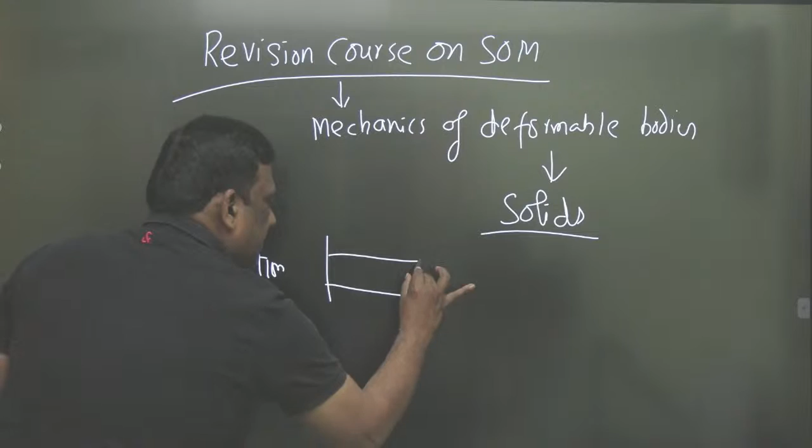The first classification is based on the direction of loading. We call this axial load - if the load is parallel to the longitudinal axis. If that load passes through the centroidal axis, we call it pure axial load. And if the load is parallel to the axis but not passing through the centroidal axis, somewhere offset, we call it eccentric axial load. Still axial, but eccentric.

Depending on direction of loading, load is also known as transverse loading - when the load is perpendicular to the axis. For example, take this member with its centroidal axis. If the load is perpendicular to the longitudinal axis and passes through the centroidal axis, it's transverse load. If the same load is perpendicular but offset from the centroidal axis, we call it eccentric transverse loading. So based on direction of loading, we categorize load into axial load and transverse load.

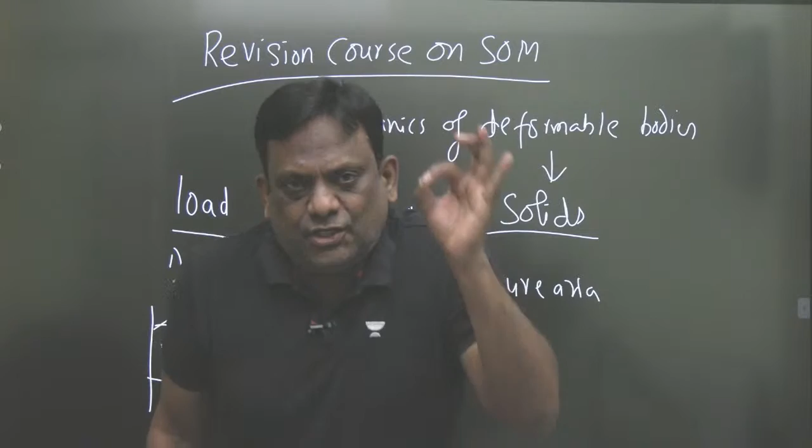In this first chapter, we'll talk about axial loads, and specifically we are not talking about any bending - let's suppose we don't know what bending is yet. So in this chapter we discuss pure axial loads. What do you mean by pure axial load? For example, if this is the member, when the load passes along the axis and through the centroidal axis, it is a pure axial load. So in this chapter we will study pure axial loads.

No problem at all, my dear students. Now we have different categories like loading based on dimensions. What do you mean by based on dimensions? It's based on length, area, or volume. For example, weight due to gravity acts throughout the volume, so it depends on volume. Similarly, taking area - pressure force, pressure acts on the area.

You already studied drag force, which is also dependent on area - greater the area, greater the drag. Similarly, based on length we have surface tension, which is force per unit length. So based on dimensions also, we can categorize the load.

Now, the loads are also static and dynamic loading. Let's see what is a static load. A load is said to be a static load when the magnitude, direction, and point of application - these three very important things - do not vary with time. That is known as static loading.

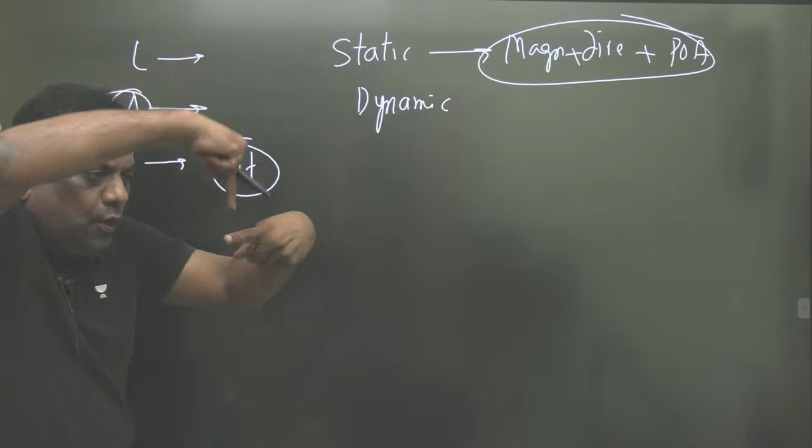For example, this is a board kept like this. If I am not using this board for 1 year, 2 years, let's keep it like this, and whatever load is there, its weight does not change with time. On the bolts, whatever load is coming is exactly the same, the direction is exactly the same, and the point of application is also the same. So dead weights are nothing but static loads.

The design of static loads is rather easy. But what is dynamic loading? When any one of these, or all three, change with time, it is known as dynamic loading.

So hope you are following. Is it okay? What is he saying? Sir, please bilingual - yes, I'll take it in both languages. Don't worry, language is not a barrier. Please just listen, don't get disturbed by the language.

Please don't disturb the flow. Now, design of dynamic loads is a bit difficult, which I had discussed in machine design - that is fluctuating loads, fatigue loads, all these we have discussed. But in strength of materials, we'll be dealing with static loads.

No problem at all. Now observe here. So what is static load, my dear students? A load which does not vary in magnitude, direction, and point of application is our static load. No problem at all, my dear students. Now observe here.

So under dynamic loads, my dear students, we have different loads like impact loads, sudden loads, and shock loads. These come under dynamic loadings.

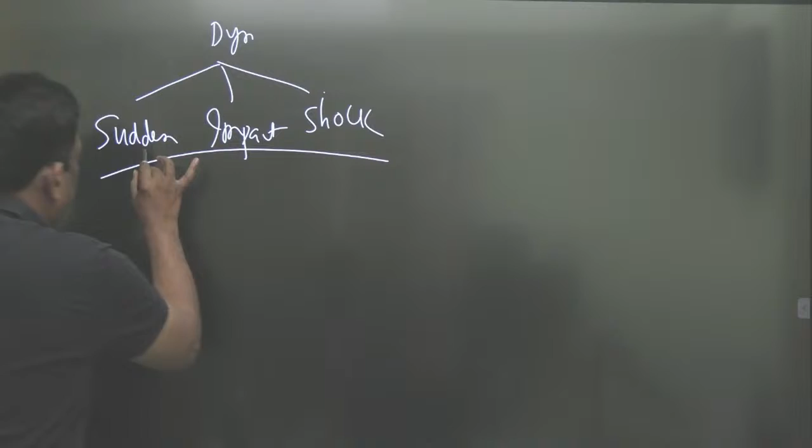Let's see what is a sudden load. Sudden load is the load which comes suddenly, but not from height - the height from which the load is coming is 0. For example, there is a railway track. On the railway track, the train is moving, and please observe - the load will come suddenly, but not from some height.

Just it passes - so for sudden load, the height from which the load is coming is 0 or approximately 0. For example, let's see in the case of brakes - let this be the drum and let this be the shoe. The distance between them is very negligible. Suddenly when you apply brakes, the load comes on this drum suddenly, but from almost negligible height, almost 0. So brake is an example of sudden load.

Now let us see what is a shock load. Shock load is where the rate of loading is so high - meaning the force will come so fast, and in a very short time.

But unfortunately, there is no prediction for shock load. You don't know. For example, tsunami, or a bomb blast - when there is a blast, the forces are so high in a short time, but the particles from the bomb come and hit maybe at different heights - you don't know, you cannot predict it.

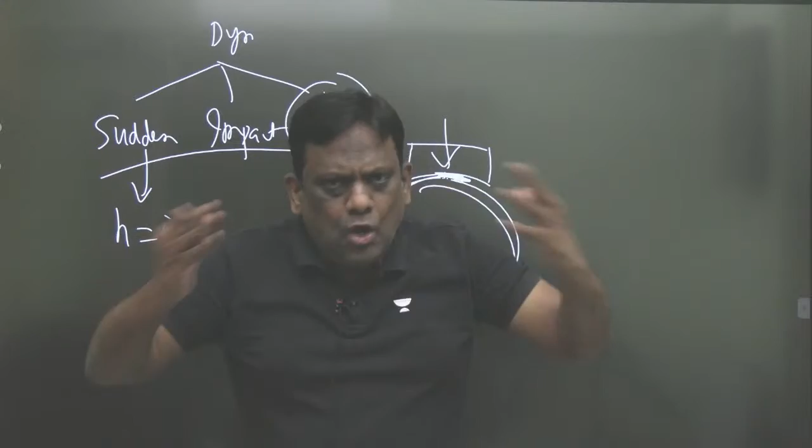They are shock loads. Then what is impact load? My dear students, impact load is an improvised version of shock loads. What do you mean by that? In shock loads, the rate of loading is high. In impact loads also, the rate of loading is very high - in both, the rate of loading is very high. But it is an improvised version. What do you mean by improvised version?

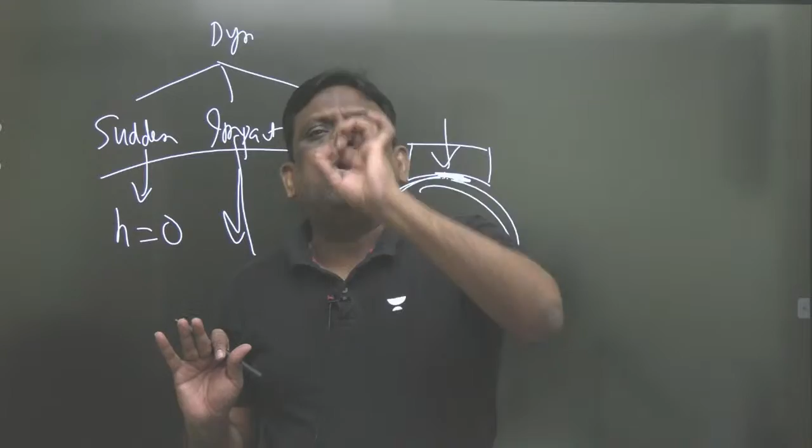Now, my dear students, in strength of materials, we make some assumptions: homogeneous material, isotropic. Homogeneous means throughout the volume, the properties are same in a particular direction. So for homogeneous material, the property does not depend on the point - at all points throughout the volume, the property is same in a particular direction.

Then isotropic - what is isotropic? Properties are same in all directions at any given point. So for homogeneous material, properties are independent of point, throughout the volume it is same. For isotropic, properties are same in different directions - maybe X, maybe Y, maybe Z. In all directions at a given point, properties are same.

So luckily, most of the materials are homogeneous and isotropic. Even if they are not, we make that assumption. For example, wood, crystals - they are not isotropic, but we make our life very simple. So in strength of materials, the complete continuous assumption is that the material is homogeneous and isotropic.

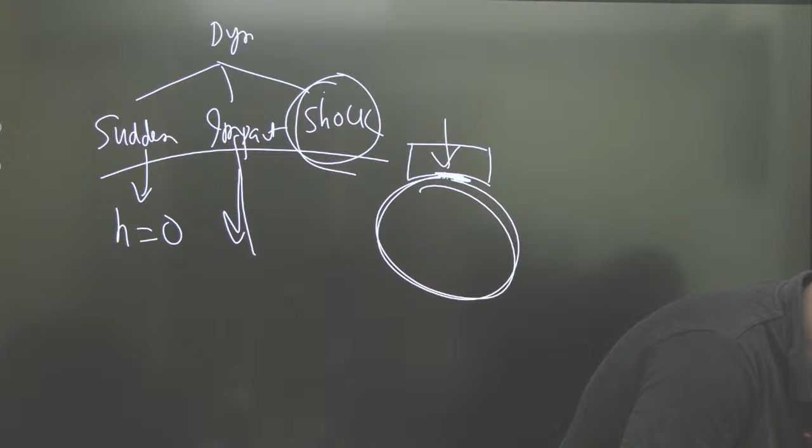Now, my dear students, let me start with this. This will be a basic introduction. Stress - in life, every time we use this word stress, stress, stress, stress, stress.

Now observe here. Let us take a member and I have applied a load of 100 Newton. Let us assume this to be frictionless and it is moving. What is the stress, dear students?

Tell me once, what is the stress? Anyone? What is the stress? Why is no one saying anything? Wonderful sir, it's 0. Now you tell me, now have a look at this.

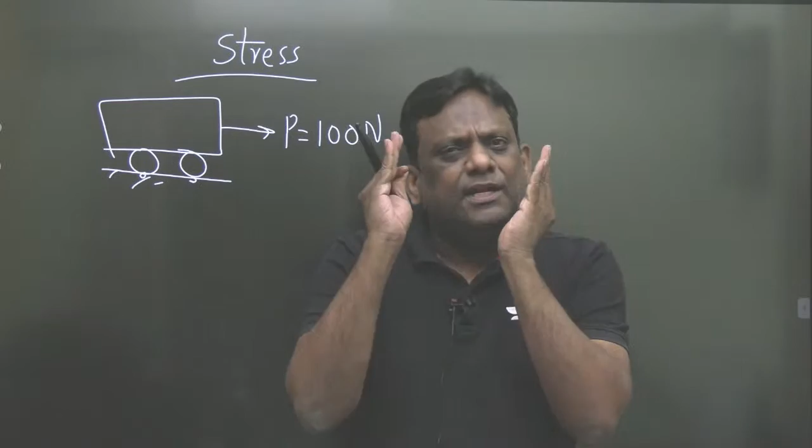Now have a look at this. We'll take that a bit here. One second please, let us not waste time. Time is very important now. Look, I will cover important theoretical points and beautiful questions, and for those who are serious, without wasting your time, I will cover new chapter questions not covered in class, not covered earlier on my YouTube classes.

Okay, let's go. Now, for example, let us take this - I have applied a load of 100 Newton here, and there is a load of 30 Newton here. Let this area on which the load is acting be 1 unit - 1 meter square, or 1 mm square, whatever it may be, 1 unit.

Now, is it subjected to any stress? Now you tell me, is there any stress? Now tell me sir. Yes, definitely. Now look, out of this 100, 30 is resisting this.

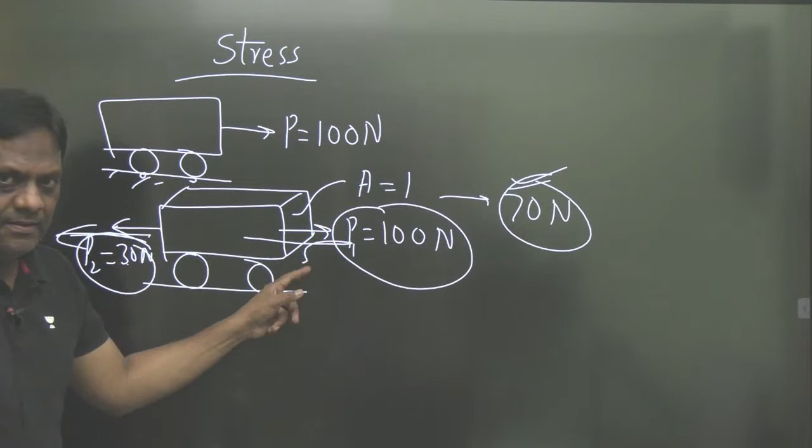So what is the net force in this direction? It is 70, so with that net force there will be acceleration of the body. But on this side, 30 is resisting this. Whatever I have applied, out of 100, 30 is resisting. It's something like this, my dear students.

I'm holding your finger and you are coming with me, happily you are coming with me. There is no restriction, there is no constraint, so you don't find any pain in your finger.

But now I'll hold this - I'll hold this, I'll not allow it to move. Now I'll pull this, you just see. I'll hold this finger, it is constrained, it is restrained, now it is not moving. Earlier it was moving like this, so no pain.

Now it is constrained, now you apply - you apply, you are finding the pain, you are finding why the pain is coming, because it is constrained to move, it is restrained to move. So therefore, whenever a member is restrained, whenever it is constrained, there will be pain in the body. That pain we call stress. So I always compare stress with pain.

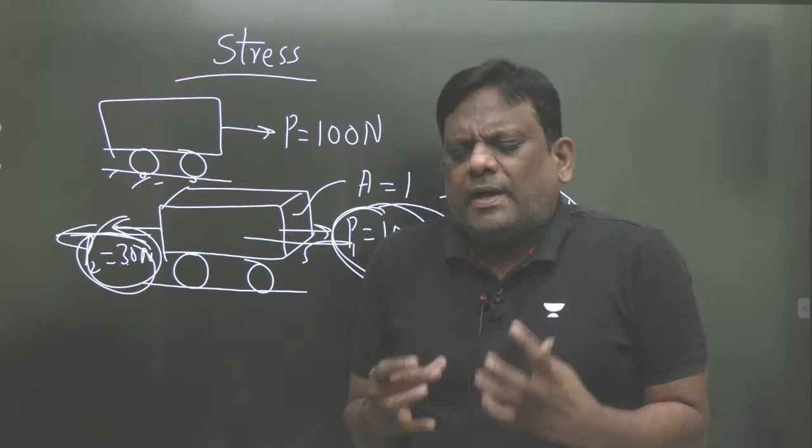I generally compare stress with pain. If the pain in the body is more, it is not a good sign, you may break down. Similarly, if the stress in the body is more, it may fail, which is not good for the material. That's why there is a need for us to study these stresses.

So the main aim of SOM is triple S: stress, strain, stability. Analyze what is stress, see what is strain, and see the stability of that member or structure. So it is based on triple S: stress, strain, and stability.

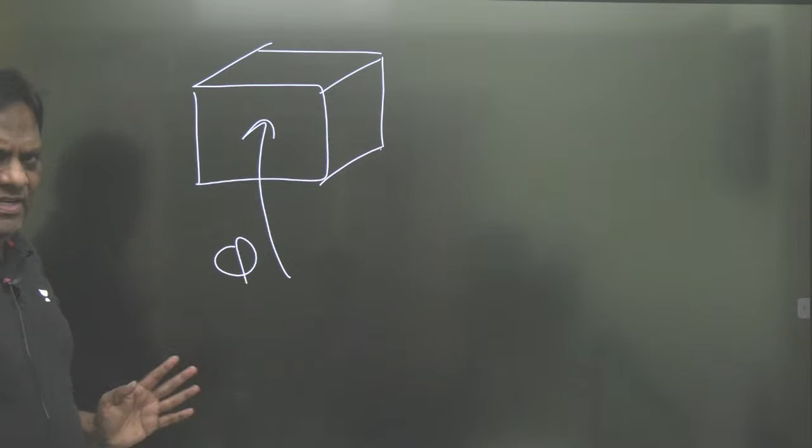There is a member, my dear students, observe carefully. There is a member and it is kept on the table. You heat it. What will happen? Most members, when you supply heat, expand. So after some time, it may become something like this.

Now tell me, is it free to expand or was there any constraint? It is free to expand in all dimensions. Whenever the member is free, like if I hold your hand versus letting you move freely, there is no pain. So therefore, there is no stress.

But originally, the member was like this, and now it is free to expand. So there was a question in GATE twice: a block is kept on the table and heat is supplied to it. The stress in the body is, it is unconstrained, it is not constrained. So the stress in the body is zero, whenever there is no constraint, when the member is free to either expand or contract.

For example, cool it a little. If you cool it, what will happen? It will contract, and it is free to contract in all directions. So when it is free to expand or free to contract, there is no constraint. When there is no constraint, there is no pain.

Meaning, let your mind also be free. Free thinking is when you don't think about others. It is also a life lesson. Without thinking about others, freely when you go ahead with your subject, freely when you learn, you will not be stressed. We call it passion, and you study for 12 hours without any pain. But if you start thinking that fellow is studying more, that fellow has completed that topic, these are all constraints in mind. When there is a constraint, you don't enjoy freely, therefore you get stressed up.

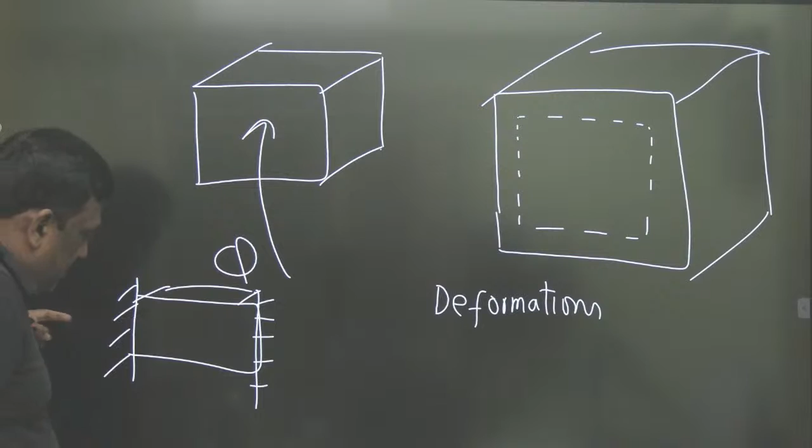Later on, I'll be telling you these deformations are linked to strain. Strain is nothing but change in dimensions, which I'll be discussing a little later. So these deformations are related to strain, I'll be telling you, don't worry.

So here, what did we constrain? In the x direction, what did we constrain? The deformation. It was not free, earlier it was free to expand, no stress. Now it is not free to expand in this direction. So what did we constrain? We constrained the deformation and the strain. When the strain is constrained, when the deformation is constrained, stress emerges.

Earlier it was not there. So when the deformation is not constrained, when the strain is not constrained, when it is free to expand, there is no stress.

So what is the reason for stress? Constraining the deformation, constraining the strain. So strain is the cause of stress. We take cause and effect here. So what is the cause of stress? Strain is the cause and stress is the effect.

That's why stress is taken on y-axis, and please look, independent is taken on x-axis. Because of this, dependent is taken on y-axis. This can be asked in interviews. Is it okay, my dear students? Can I proceed, sir? Go ahead, very good sir.

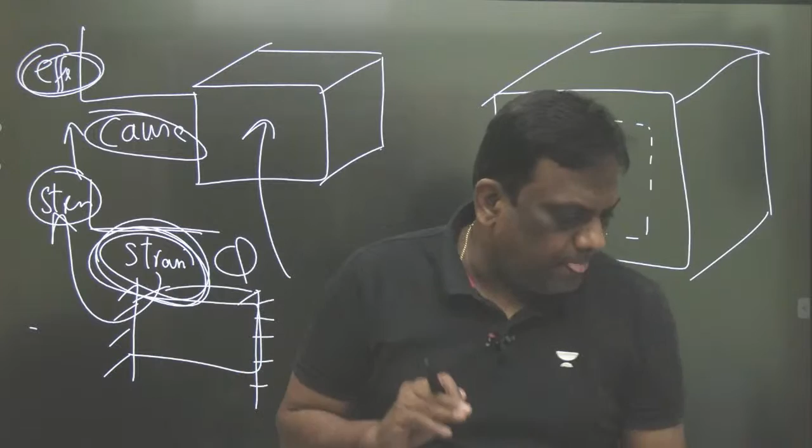So now let's see what exactly is stress. Whenever a member is constrained, stress is developed. So what is the cause? Whenever deformation or strains are constrained, the member is subjected to stress. So stress is developed.

Now let's see the different types, what exactly is stress. Look carefully. I told you, when it is constrained, when I am pulling, there is pain in the finger. That pain is your stress. So I have to quantify that pain, give some magnitude, give some value.

Physically you have felt what exactly is stress. Now let me explain mathematically. Physically, stress is nothing but your pain.

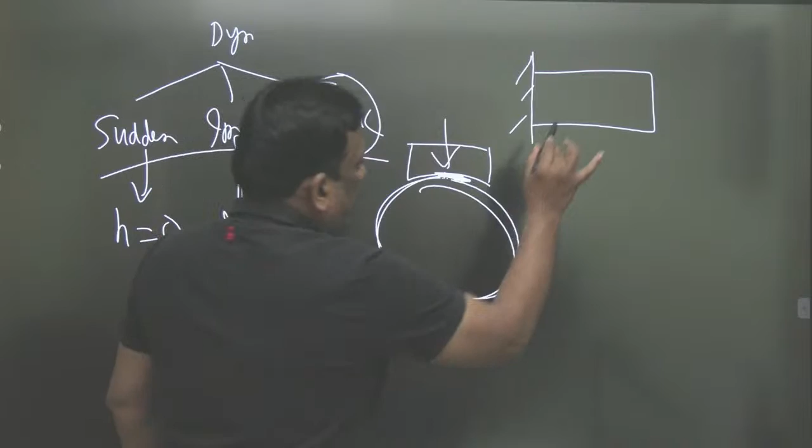Now, for example, let us take a member. Let me apply force P. Now it is in equilibrium, it is in static equilibrium. So let us cut and see the section XX. So observe here.

Now this is the external force, and that external force we call it as load. If I draw this, will it be in equilibrium? Absolutely no. There has to be some internal resistance to this. Because why there is a resistance?

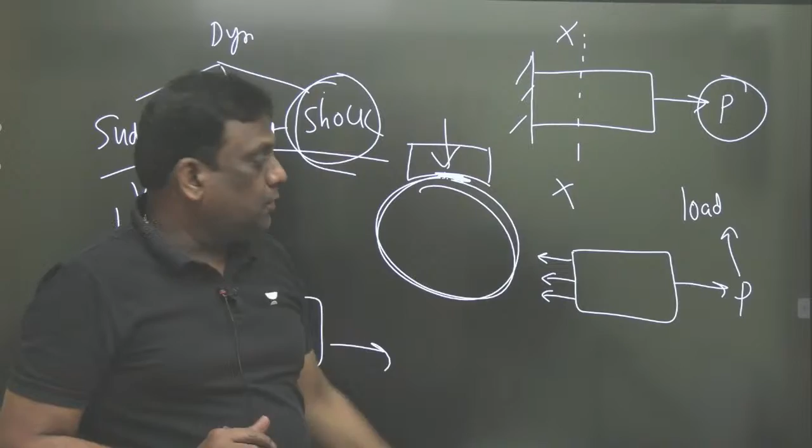Because it is constrained. Unlike this example, there is no constraint, so therefore there is no internal pain, internal resistance. But it is constrained here, you have fixed it here. So when I am pulling it, it is fixed like this and I am pulling. So therefore there is a constraint, and therefore internal resistance is developed to this external load.

And this internal resistance, moreover, it has to be in equilibrium. For equilibrium, whatever external load is applied, it is in static equilibrium, and this should be exactly same. We call it internal resistance to this external load, and since it is in equilibrium, this will be equal to P.

So stress is defined as the internal resistance offered by the material acting per unit area. On what area is it acting? For example, look here. It need not be of this shape, it can be any shape. Let this area be A.

Let this be P. And if you cut, you will be seeing something like this. This is the external load. On this area there is an internal resistance, and that per unit area, which is nothing but P per unit area, is known as your stress. So please note that it is the internal resistance.

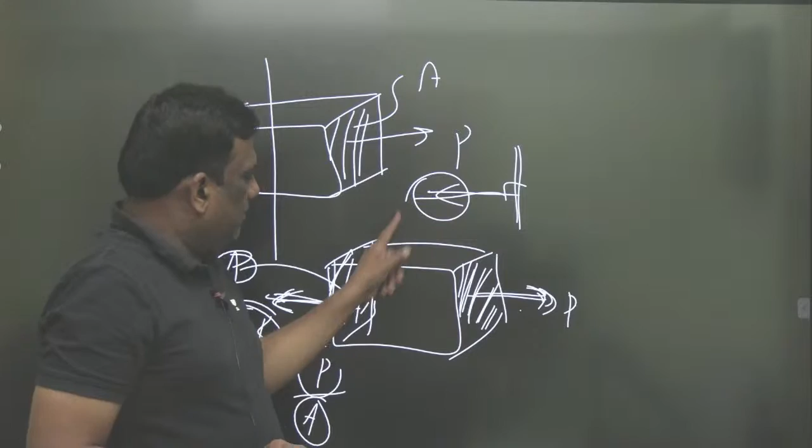And stress is of two types. One is normal stress. Normal stress is the stress which is perpendicular to the plane. For example, here on this plane, the load is like this. So on this plane, the resistance is perpendicular to this plane. And that perpendicular load per unit area, meaning internal resistance per unit area when it is normal to the plane, you call it normal stresses.

Normal stresses - look, the load can be like this also. For example, if this is the plane, it can be inwards into the plane or out of the plane. When the load is out of the plane, perpendicular, we call it tensile. When it is inward into the plane, it is known as compressive.

But both are normal stresses. And what is the unit? Resistance is in Newton, area is in meter square. So it can be Newton per meter square, or Newton per mm square, or kg force per millimeter square, or centimeter square. We can have so many units for this, so there is no need for you to worry.

Now there is one more type of stress. What is that stress? It is a shear stress. For example, let's see what is a shear stress. Let us take a member like this.

Okay, and it is fixed here, it is constrained. Now let me apply a load like this. This load is in this plane, parallel to the plane. So because of this, if there is no constraint, it will move freely, but there is a constraint. It cannot move, so therefore resistance is developed in the opposite direction.

If this is the applied load, there is a resistance like this, and for equilibrium these two should be same. And thereby, this internal resistance on this area, that is your stress. This stress we call shear stress or transverse stress. It is tangential - shear stress.

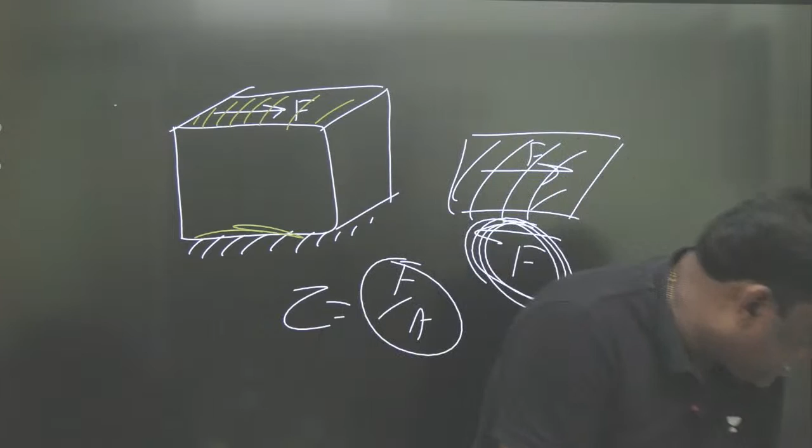Up to this, is it okay, sir? Up to this, is it okay? Can I move ahead? No problem at all. Okay, should I increase the pace or is this fine? A little faster? Very good, very good.

If you want, wonderful students. So stresses are of two types - normal and shear. I'll designate normal stress with sigma and shear stress with tau.

No problem at all. Is everyone clear up to here? No problem up to here? Now observe here - is stress a property? Absolutely no.

For example, let us take a member. Is it a material property? Let's check once. Same dimensions - there is A, there is B, same dimensions, both exactly same, and the cross section is also exactly same. Geometrically both A and B are same, but the only difference is material is different. Say this is made of copper, this is made of steel.

Material is different. Now I'll apply 100 Newton here too, I'll apply 100 Newton. Let this area be 5, let this area also be 5. I'm least bothered about units as of now. You tell me what is the stress in this.

You tell me what is the stress in this, my dear students. So what will it be? It is 100 by 5 - that is internal resistance will be 100 by 5. So that means it is 20. It is also 20. So now you tell me, is it okay?

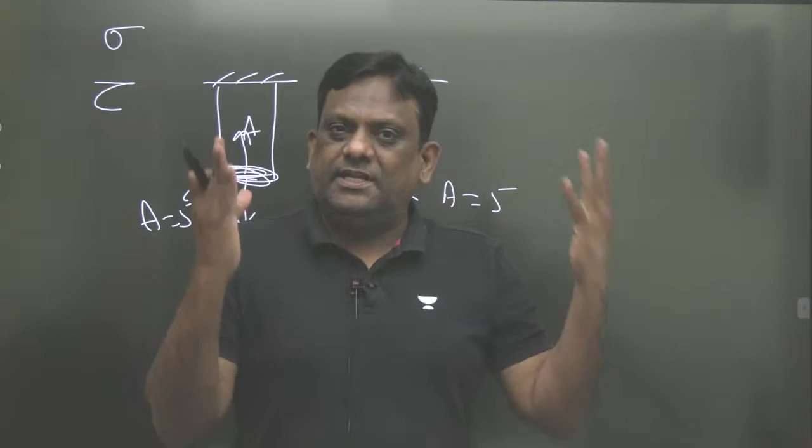20, wonderful. So now you tell me, is this stress depending on the material? No. So whenever I say property, it is exclusively for a material. But materials are different, yet the value is same. That means stress is depending on what - the load and the area. So area is same, load is same, so stress is the same. Therefore stress is not a property, but strength is a material property.

Sir, what is this strength? Look carefully - this material can bear, my dear students. So therefore, please understand.

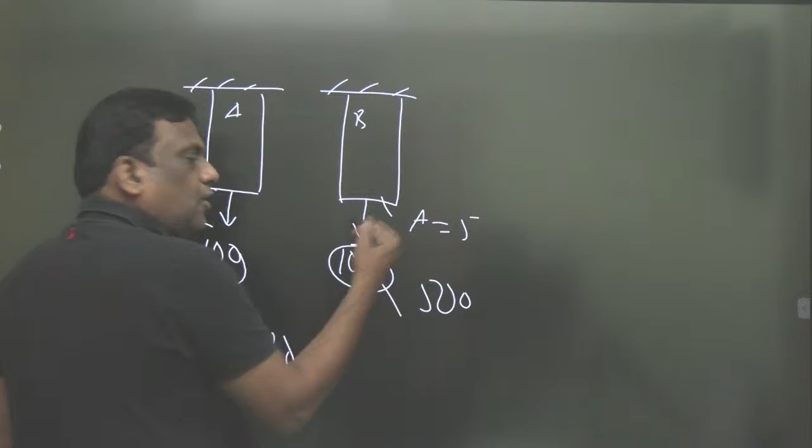How much maximum can it take? Suppose this takes 100. If I put 101, it will fail. So what is the strength? It is 100 by 5. And suppose if I put 500, it will not fail. If I load it with 501, it is failing. So maximum it can take is 500. So 500 by 5, it is 100.

So the strength of this material is 100, the strength of this material is 20. So stress is not a property, but strength is a property of material. Is it okay, my dear students?

Sir, in strength of materials, I'll be loading within elastic limit. We will see elastic limit later. Up to this point, is it clear, sir?

Now, please understand, my dear students. Please understand. Whenever a member is loaded, you can observe two things. Let me repeat, sirs - whenever a member is loaded, you can observe two things.

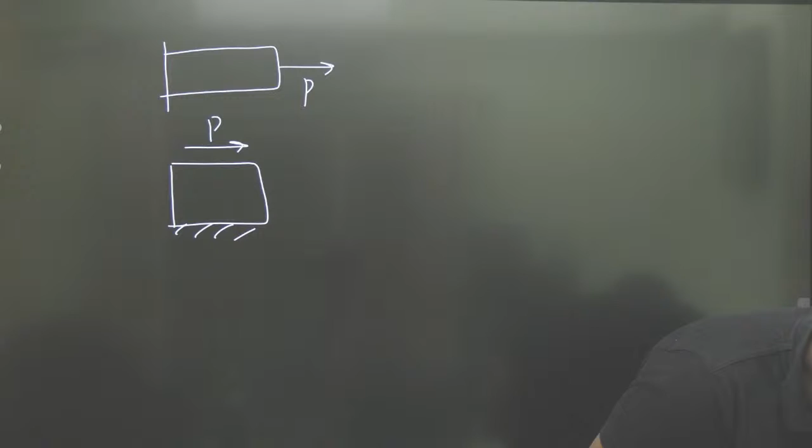I'm in class, yaar. Useless fellow. Unnecessarily, why do they disturb? Already cut the call.

Now, let us suppose this - look once. When the member is loaded like this, what is your expectation? I mean, what are your guesses? The length will increase, so it will be something like this, and when the load is applied like this, it may deform like this.

Both are deformations, sir. In one case, you are observing change in dimensions - length is increasing, the y dimension is decreasing, maybe diameter or depth, it is decreasing, length is increasing, but the cross-sectional shape is not changing. Understand carefully - for example, if there is a normal load...

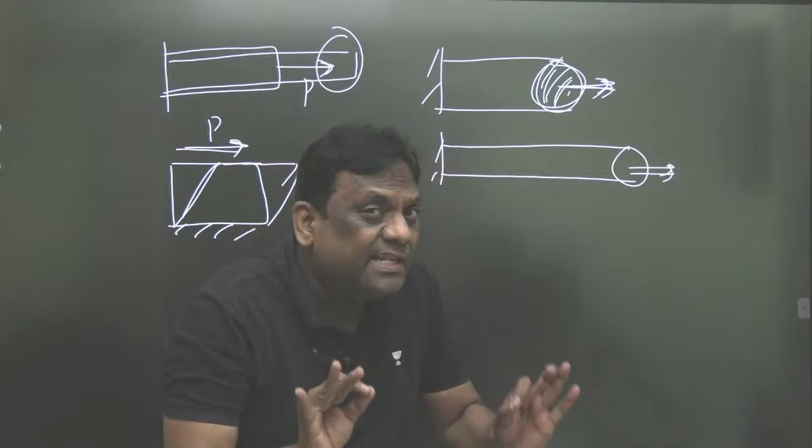After some time, it may become like this. So you tell me, what type of load is this? Normal. So normal loads or normal stresses result in - this is a very important point, sir, questions will come from here. What are the questions? To confuse you, he will give shear.

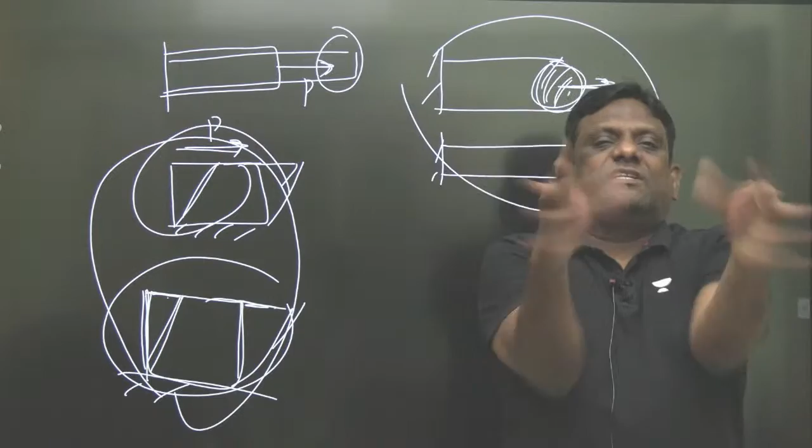To confuse you, he will ask: a member is loaded by a normal stress of so and so, shear stress of so and so - what is the change in volume? So to confuse you, he has given shear stress. Don't touch that shear stress, just take normal stresses which are responsible for change in dimensions. So the golden point you need to write here: normal stresses result in change in dimensions, and shear stresses do not result in change in dimensions, but they result in change in shape.

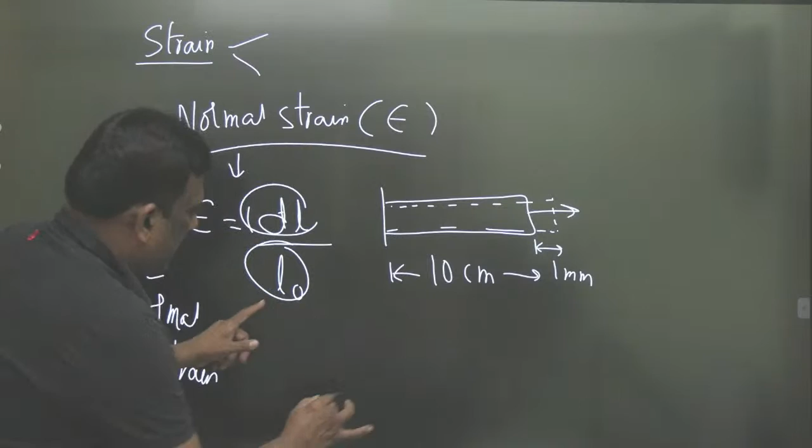Very good. Now look carefully. Suppose the original length of this member is 10 centimeter. Now I have applied a load like this. So because of this load, the member has deformed or elongated, say by 1 mm. So what is the change in length? Original length was 10 centimeter - can I write that as 100 mm? Yes, I can write it as 100 mm. This is the original length.

And what is the change in dimension? It is 1 mm. So therefore it is 1 by 100. So strain is dimensionless, or you can express this in percentage. If you want in percentage, I can write it as 1%. Strain is 1% because when I study malleability, brittleness, ductility, I will express strains in percentage. So around 1% in this case.

So these strains are nothing but normal strains, normal strains, normal strains. Wonderful - so measuring normal strain is not a problem. That's why when we go for strain rosettes, normal strains can be measured, but shear strains are calculated.

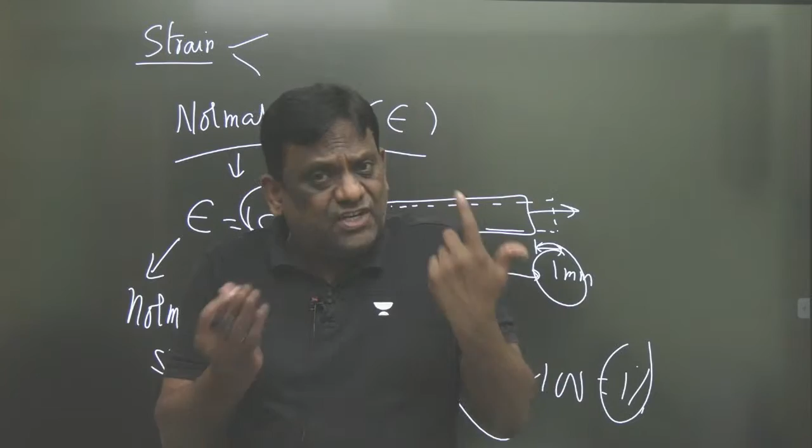Now let's see. And please, one more thing my dear students - strain is a fundamental quantity. What do you mean by fundamental quantity? I can measure it easily. But stress is not a fundamental quantity.

And one more thing, my dear students. For example, stress - look carefully, this is a very important point. For example, there is a load like this and say the stress is, for example, normal stress - normal I will designate by sigma. Let us say it is 50 Newton per mm square, and Newton per mm square is also megapascal. Let us say it is 50 megapascal. Wonderful.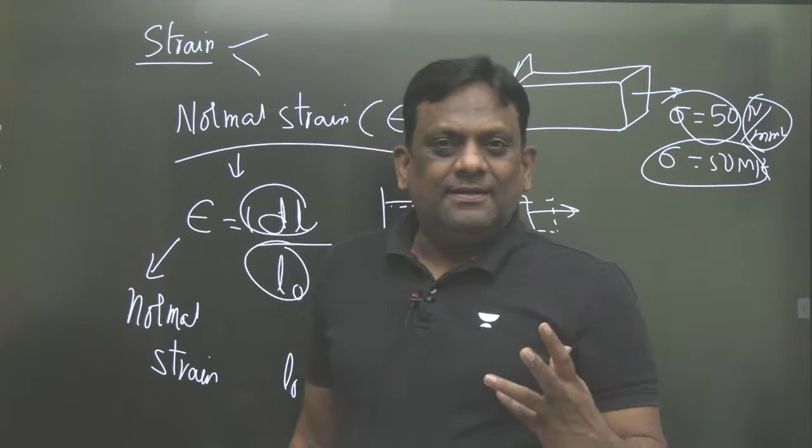Please look at mere satisfaction - if any physical quantity satisfies magnitude and direction, it is not necessary that it be a vector. If a particular quantity satisfies having magnitude and direction, it may be a vector, it need not be a vector. So same is the case with stress - though it has magnitude and direction, it does not satisfy laws of vector. What are the laws of vectors? Triangle law of vector, parallelogram law of vectors, polygon law of vectors - it will not satisfy these.

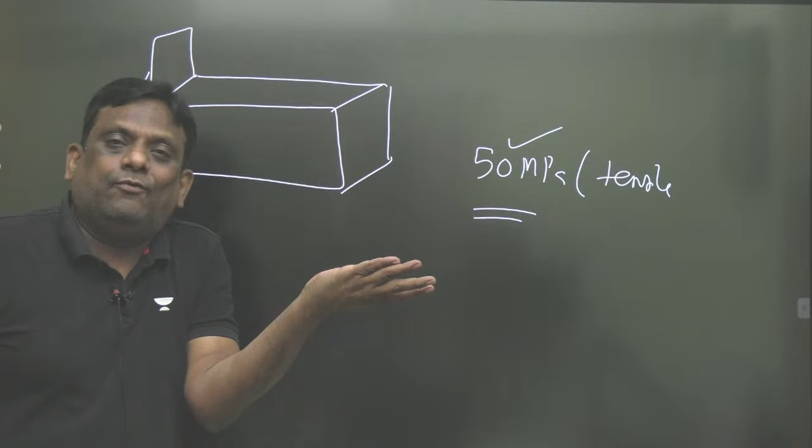अब देखो, 50 मेगापास्कल टेंसाइल बोला. अब ये प्लेन पे टेंसाइल है या ए प्लेन पे टेंसाइल है? लिसन केयरफुली, इसके लिए टेंसाइल है या फिर परपेंडिकुलर, वी डोंट नो. सो देयर इज अ नीड फॉर अस टू स्पेसिफाई द डायरेक्शन, द प्लेन ऑन विच इट इज एक्टिंग. दैट्स व्हाई इट इज टेंसर ऑफ सेकंड ऑर्डर.

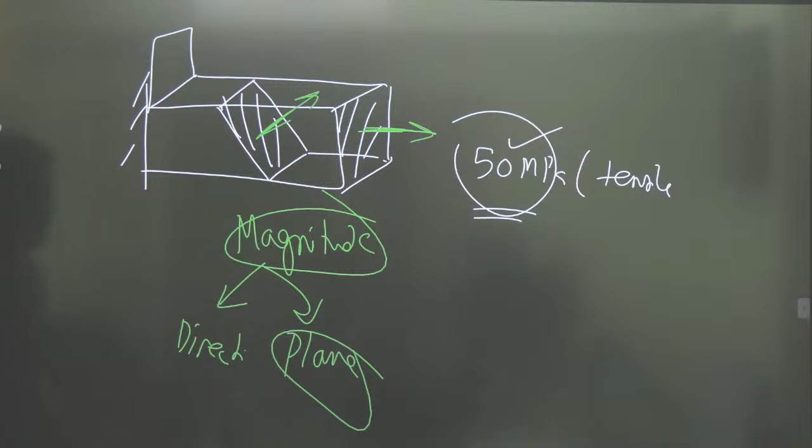व्हाट डू यू मीन बाय सेकंड ऑर्डर? सो मैग्नीट्यूड तो चाहिए ही चाहिए, बिकॉज स्केलर को भी मैग्नीट्यूड चाहिए. स्केलर का मास जस्ट इनफ, मैग्नीट्यूड. बट यहां पे यू नीड डायरेक्शन. इज इट perpendicular to the plane or in the plane? Direction तो चाहिए, apart from direction, you need plane. You have to specify the plane on which it is acting. So magnitude के साथ साथ दो चाहिए - ये और ये, दैट्स व्हाई इट इज टेंसर ऑफ सेकंड ऑर्डर।

अब देखो सर, आराम से, और एक स्पेशल पॉइंट बताता हूं। लेट अस टेक अ स्पेशल पॉइंट, फॉर एग्जाम्पल आई टेक अ स्पेशल केस ऑफ दिस। फर्स्ट लेट अस टेक द स्पेशल केस ऑफ नॉर्मल स्ट्रेन। सब लोग जिंदा है रे? यस, जिंदा है। स्पेशल केस ऑफ नॉर्मल स्ट्रेन।

माय डियर स्टूडेंट्स, let us take this as origin, and there is a line. All distances are measured from this. For example, this is the member and loaded like this - मान लो इसको हम लोड ऐसा डालें. This is the x direction, X is measured from here. बहुत carefully देखना सर, this is very important.

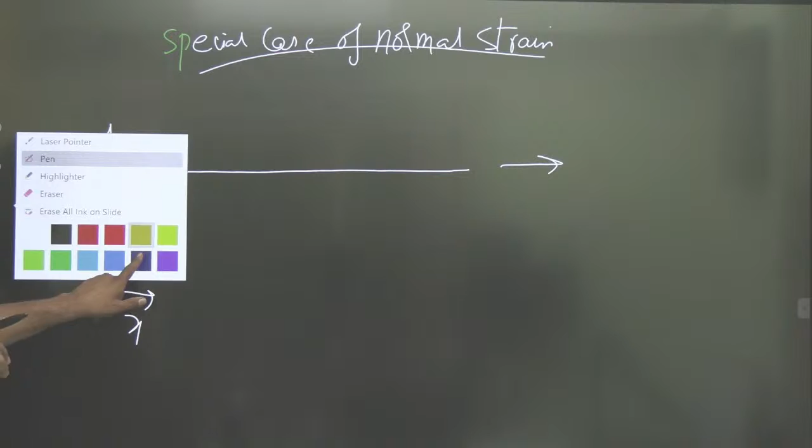This year there can be a question on this, अब मुझे blame मत करना. This year the question can be on this, अब मुझे blame मत करना. इधर देखो, अब इधर देखो रे, ना देखो.

Let me take this as point A and let this length be XA. Let me take this as point B and let this length be XB. Now I am interested in this member, I am interested in this length. Now you tell me what is the original length - can I write this is before loading. माय डियर स्टूडेंट्स, अभी इस मेंबर पे लोड नहीं डाले, ये एक ऐसा ही लाइन सेगमेंट है, इस पे लोड नहीं डाले। लेट दिस लेंथ बी XA, लेट दिस लेंथ बी XB। व्हाट इज द ओरिजिनल लेंथ? AB के बीच का लेंथ - दिस इज ओरिजिनल लेंथ, मतलब लोड डालने से पहले, सो इट इज XB माइनस XA।

Let me write it as DX - change in this length. Is it okay? Wonderful sir, wonderful.

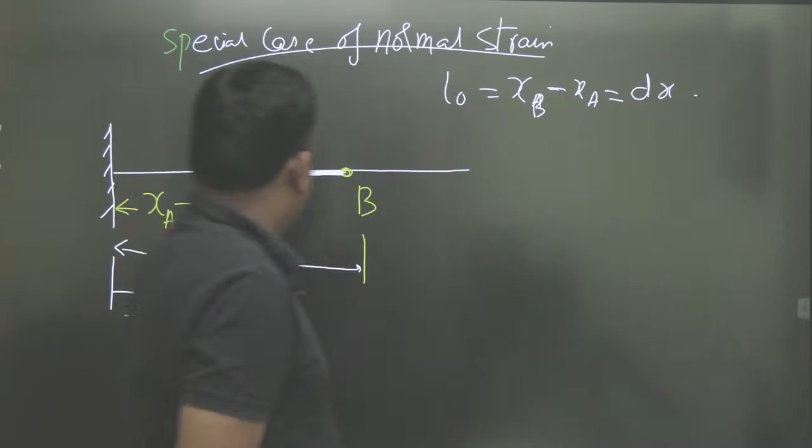अब देखो, now let me apply load. लोड अप्लाई करने के बाद, डियर स्टूडेंट्स, मान लो ये पॉइंट यहां आ गया, मतलब कितना शिफ्ट हुआ? पॉइंट ए कितना शिफ्ट हुआ? लेट मी राइट इट एज यूए। यू का मतलब डिस्प्लेसमेंट ऑफ पॉइंट ए। एक्स डायरेक्शन में जो भी डिस्प्लेस हुआ मैं उसको यू करूंगा, वाई डायरेक्शन में जो भी डिस्प्लेस हुआ उसको वी करूंगा। नाउ आफ्टर द एप्लीकेशन ऑफ लोड, लेट दिस पॉइंट मूव टू दिस पोजिशन, मान लो लेट दिस बी सम यूबी। यू टेल मी व्हाट आर यूए एंड यूबी।

यूए यूबी दिख रहा है, वेरी गुड। ए इधर शिफ्ट हुआ, बी इधर शिफ्ट हुआ। सब डिस्टेंसेस ऑरिजिन से। अब फाइनली कैन आई से माय ए वाज हियर, नाउ इट इज हियर, माय बी वाज ओरिजिनल हियर, नाउ इट इज हियर। कैन आई कॉल दिस एज द फाइनल लेंथ? क्या मैं इसको फाइनल लेंथ बोल सकता हूं? डेफिनेटली इसको फाइनल लेंथ बोल सकता हूं सर। आज कुछ तगड़े 15 क्वेश्चंस करने वाले हैं, थ्योरी कंप्लीट करने के बाद नए 15 क्वेश्चंस वी आर डूइंग। लेट मी कंप्लीट थ्योरी फर्स्ट। आर यू रेडी?

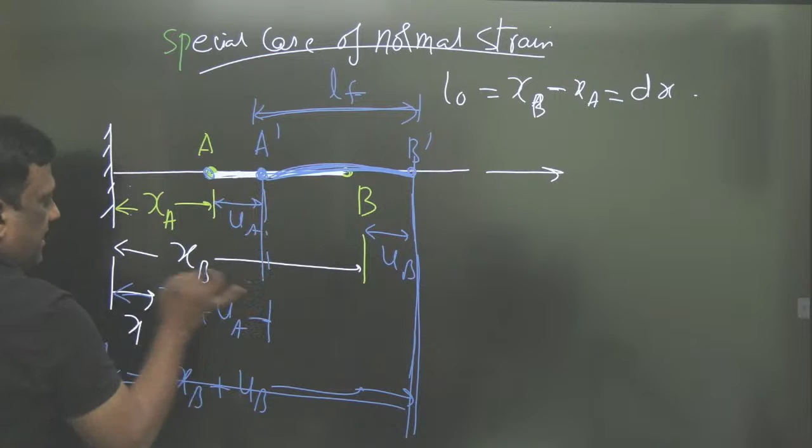If you want this final length, it is this length minus this length, that is XB plus UB minus XA plus UA. So therefore the final length is XB plus UB minus XA plus UA.

Now you tell me what is the final length. It is XB minus XA plus UB minus UA. So therefore the final length is... I'm going a bit fast because this is not a regular class. In a regular class I teach SOM in 100 hours, so we can't go slow since it's examination time, this is only a revision class. Is it okay? Right, now can we write this as, what is XB minus XA?

XB minus XA is original length, plus we write UB minus UA as DU. UB minus UA is written as DU, exactly.

Now tell me, what is strain? Dear students, what is the strain? Strain is nothing but... one second please... strain is nothing but change in length by original length. I'm talking about engineering strain, not true strain right now. So what is the change in length? Therefore it is final length minus original length by original length.

Final length, so let me calculate. What is final minus original? You bring LO to this side. So LF minus LO, what does that become? It becomes DU. LF minus LO is DU by LO. What is LO? It is DX. So please note that the strain in X direction is given by...

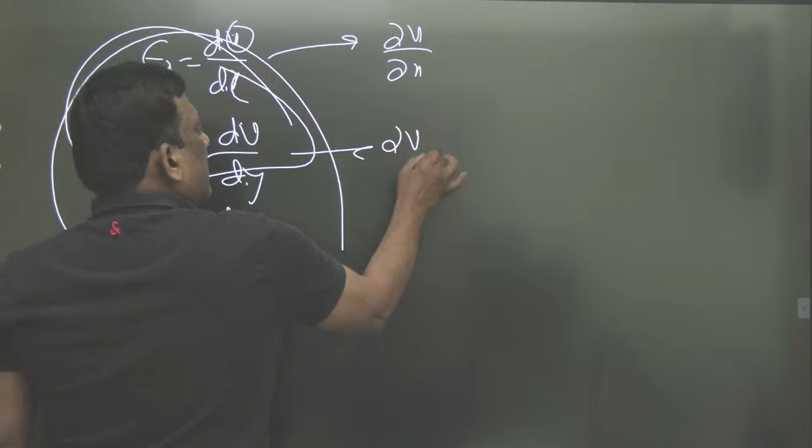This is very important. Suppose in the exam the displacement in X direction is given as X square Y plus X cube, and something in Y. So what is the strain in X direction? Note that at some point, say at point 1,3, nothing but do dou U by dou X. If you need strain in X direction, do dou U by dou X, and you get some value, put it wherever you want and you can get the normal strain.

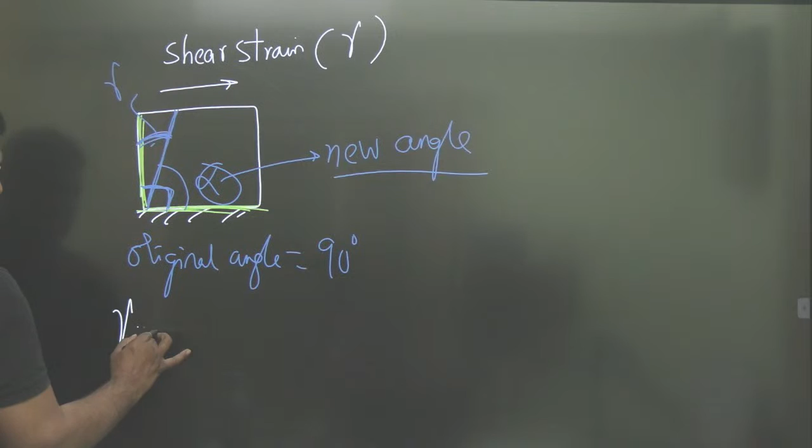What was the original angle? The original angle is 90 degrees. Between these two lines, the original angle is this, 90. What is the new angle? The new angle is alpha. It changed - originally it was 90, now it is this angle. The change in angle with respect to the original perpendicular line segments is called shear strain. So gamma is equal to original minus new: original is 90 and the new is alpha, and this is my shear strain.

In this case, what is alpha? Alpha is less than 90, and the convention is such that this shear strain is taken as positive. So don't say we always take it as positive - for example, let me explain.

I will tell you one important point. So originally it was 90. Afterwards, let us say this line has deformed something like this. Now this is the final angle. What is the change in angle? Originally it is 90, now it is alpha. What is the change? It is this. And alpha is greater than 90, so therefore this is negative.

So whenever the final angle is more than 90, such a shear strain we take as negative. Whenever the final angle is less than 90, such a shear strain we take as positive.

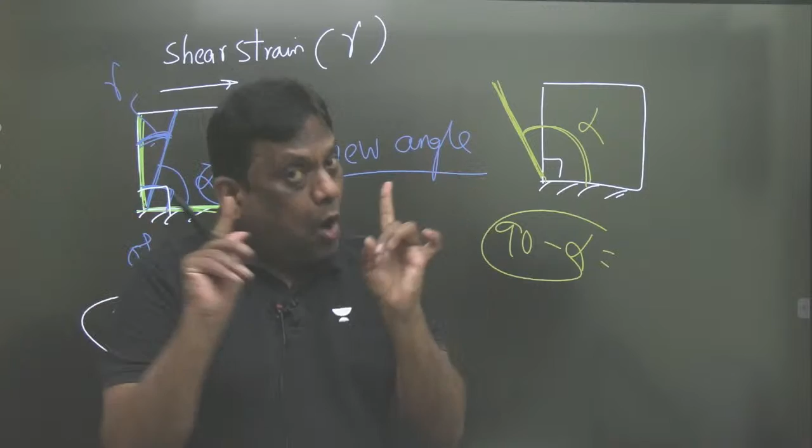Now there was a question in GATE examination where he has not mentioned any convention. Listen carefully - he has not mentioned any convention. And initially, when the key was released, he took this convention. What is that convention? When final angle is... and one more thing, this shear strain is measured in radian. I repeat, shear strain is measured in radian.

Now look, the original angle is 90. Let the final angle be 89. What is the shear strain? 90 minus 89, it is 1 degree. But don't put it as 1 degree - you put it in radian. 180 degrees correspond to pi radians, so 1 degree is how many? Therefore 1 degree means pi by 180 radian.

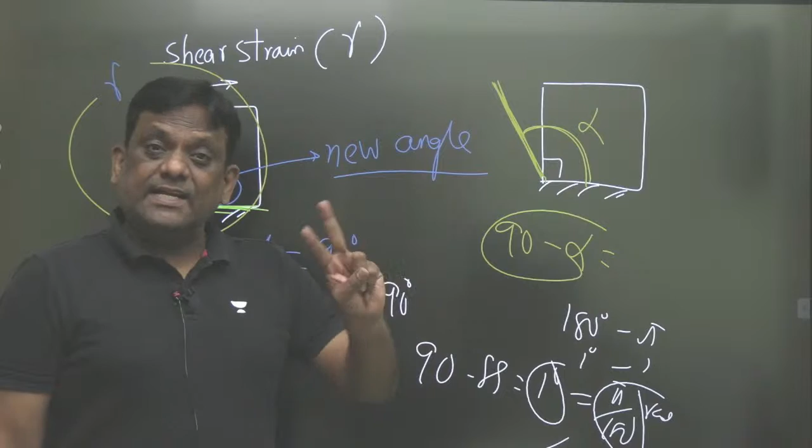That's it. So there was a question exactly like this, and there were two options: one was positive pi by 180, and the other option was minus. Some students gave pi by 180, others gave minus pi by 180. He had not mentioned any convention. When the key was released, he gave positive as the answer, but some people challenged it because convention was not given - that is your convention. That's why finally he gave both answers as correct. The final key release happened, and both were correct.

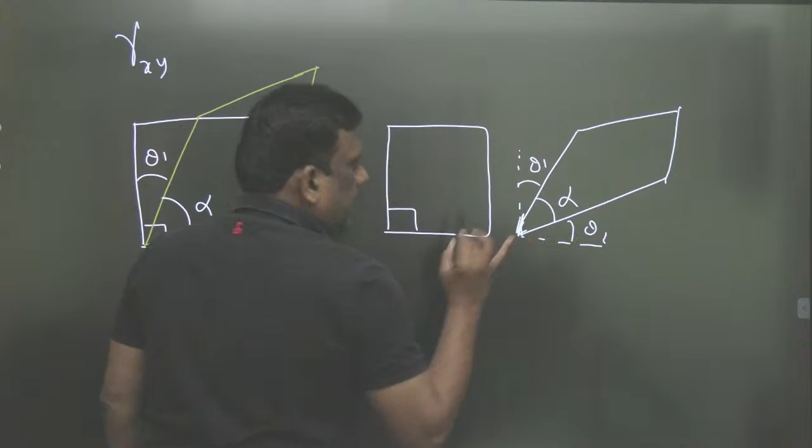Now let's find out what is the shear strain in this case. So originally what was the angle? Look once - this is original, 90, and finally it is like this. Look, finally because of loading the shape has become like this. So let this be theta 1, let this be theta 2. Look, originally it was 90, now it has become alpha.

What is shear strain? It is original angle minus final angle. Original this line and this line - now this line has come here, this line has come here. So what is the final included angle? Alpha. So original minus alpha, that is the shear strain.

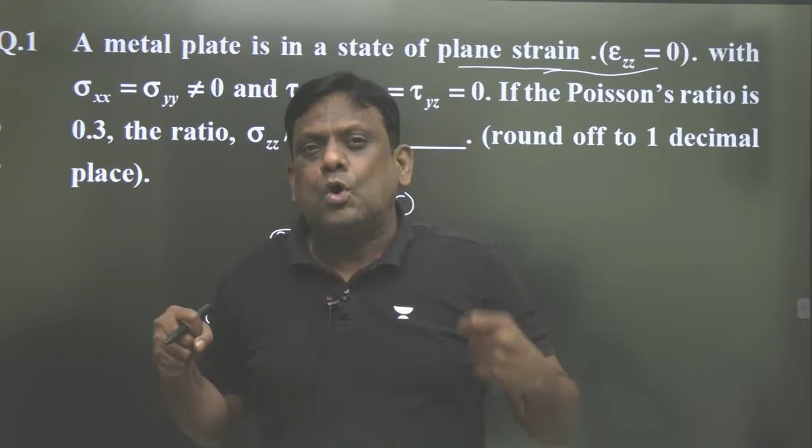Look here, you know that the strain in z direction is given by - does anyone remember - sigma z by E minus nu by E into (sigma x plus sigma y). Is it correct? Does anyone remember this equation? Is it clear sir? Is it clear my dear students? Is it clear? Does anyone remember? Very good Pushpendra ji, wah.

So already he has given plane strain. So what is epsilon z?

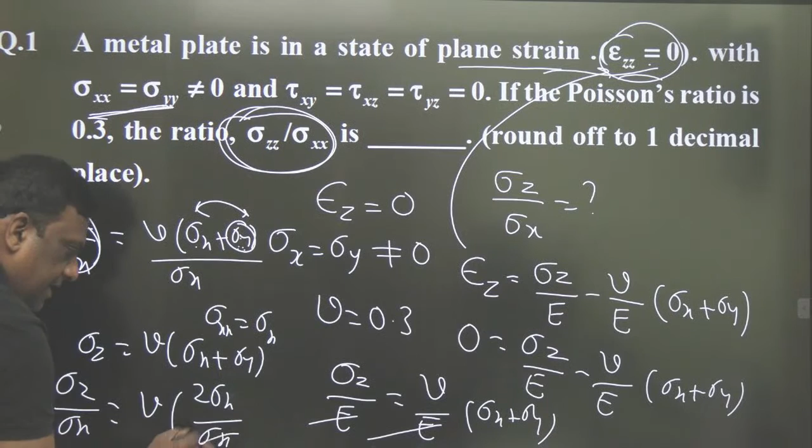So therefore sigma z by sigma x is equal to 2 times Poisson's ratio. The Poisson's ratio is given as 0.3, so this is equal to 0.6. So the answer is 0.6.

Is it clear my dear students? Dear students, is it clear? Final answer is 0.6. Anil Verma, you are wrong. Anyone got 0.6? Anyone got 0.6?

Very good. Next question.

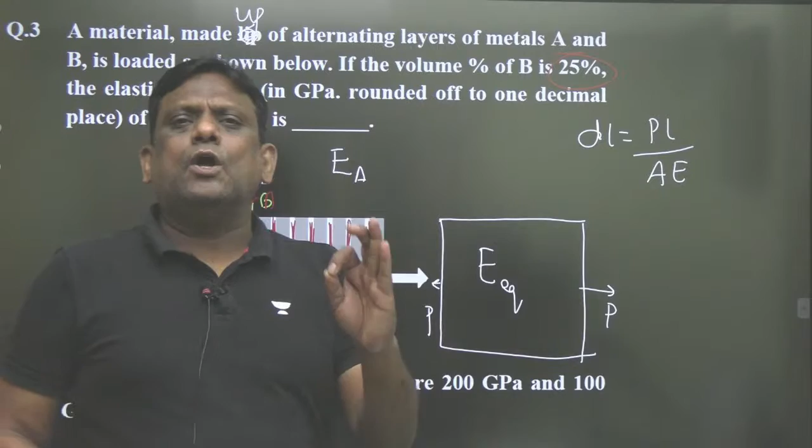But to apply this, what are the conditions? I told you in class - the member should be prismatic, meaning everywhere the cross section is same. Look here, if you see the cross section, everywhere it is same, everywhere it is same. Yes or no? Whether it is this cross section or that cross section, everywhere it is uniform.

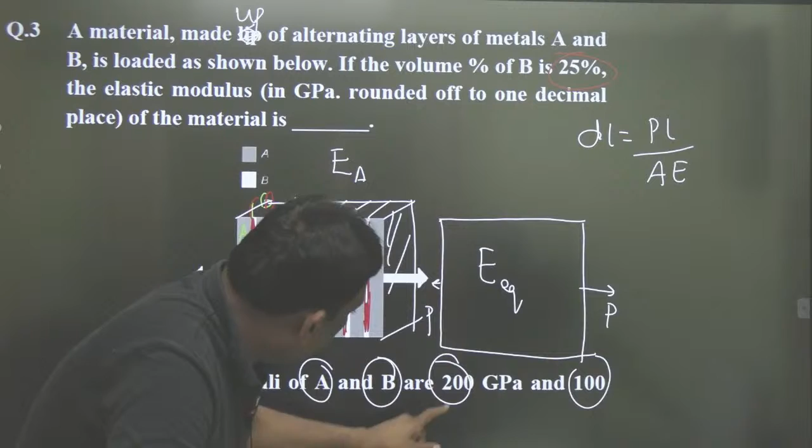Here, yes, let this be the total length. Its equivalent is this, this is the equivalent, and this is A.

Don't worry, don't worry. Anyone got the answer? Waiting for answers. But no one gave an answer sir, no one is answering, that's not good. The Young's modulus of this red one is B, this is B. The Young's modulus of B is given as 100 and the Young's modulus of A is given as 200. Correct?

Under the action of load - if this length is L, then it is L. Now look sir, he has given that volume is equal to area into length.

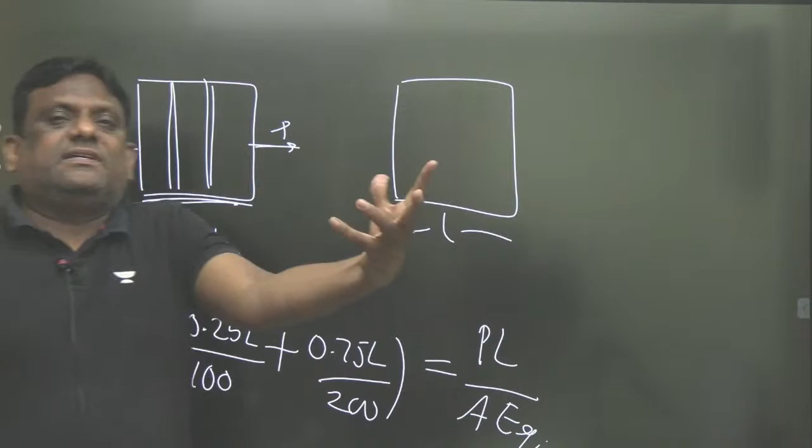My dear students, let me repeat. Volume is 75%, 25%, but volume is area into length. Area is not changing, so when area is same, volume depends on length. So B part length is 25%, A part length is 75% of the total length.

So PL by AE - load is same, area is same, so take P by A common. When I take P by A common, L by E will be left. L is, for B it is 0.25 and 100, for A it is 0.75 and 200. That should be equal to equivalent. P total length is L by area, same area, E is equivalent. So P by A is gone, L common, take it out.

So therefore 0.25 by 100 plus 0.75 by 200 is equal to 1 by E equivalent, L is gone. L is cancelled from both sides.

Is it clear, sir? 160 is the right answer. Anyone got the answer? That was a good question, sir.

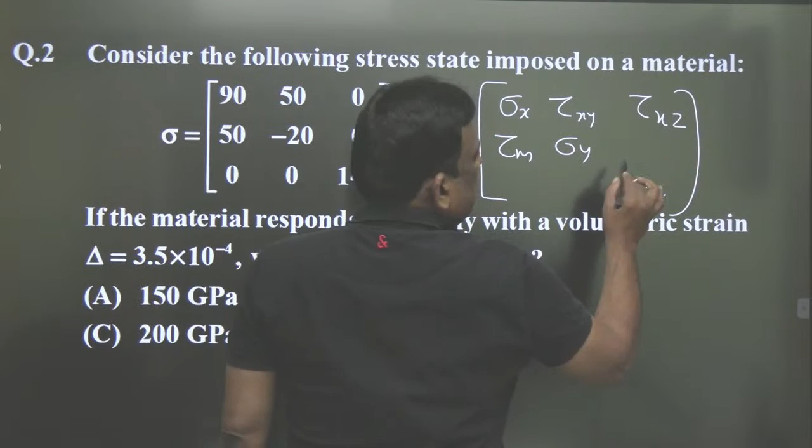I am interested - now look, is it clear? Dear students, is it clear?

Now let's see this - now tell me, what is this? Dear students, what is this? Can I write it as sigma x? What is this - sigma y. Can I write this as sigma z? Yes.

Now look what is asked - if the material responds elastically with a volumetric strain of... what is the volumetric strain? The volumetric strain is given by - good question, sir - 3.5 into 10 power minus 4. Okay, no problem at all.

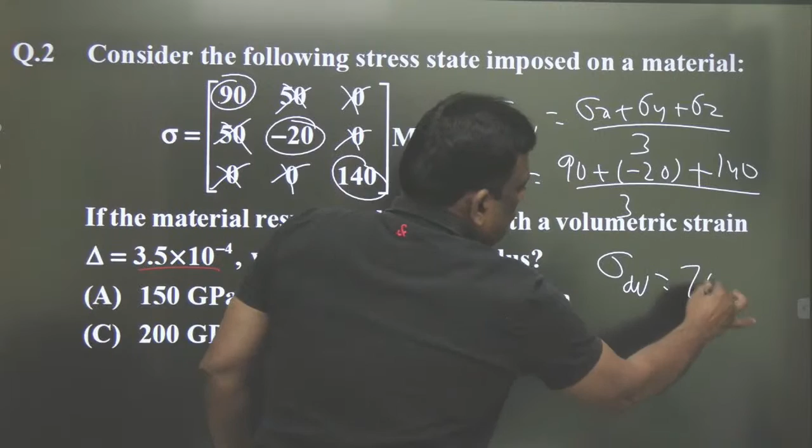Look at the units - all these are in megapascal. So this value is in megapascal, and volumetric strain has no unit, so K will be in megapascal. So K is equal to sigma average, 70 megapascal. I have already calculated volumetric strain as 3.5 into 10 power minus 4.

So you will get this as how much, sir? It's coming to this much, sir. Say it once. How much is this?

20 into 10 power 4 megapascal, correct? 10 power 4 goes up, so it's 200 into 10 power 3 megapascal. What is 10 power 3 megapascal? Gigapascal. So the answer is 200 gigapascal. Anyone got this answer?

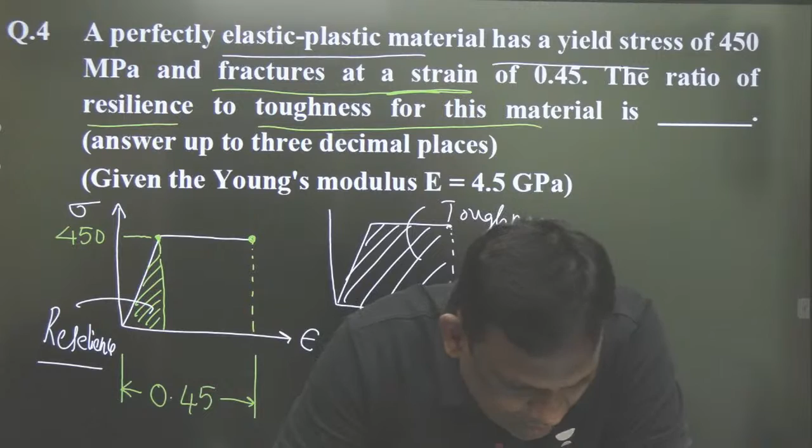Anyway, doesn't matter. He is asking this area to this area - how will we calculate it sir? Did anyone get the answer? Only Vaibhav Patil has given the right answer. Very good sir. How will we do this?

Listen carefully. Young's modulus is given as 4.5 gigapascal. Can I write this Young's modulus as 4.5 into 10 power 3 megapascal? Because I am converting gigapascal to megapascal, so it becomes 10 power 3 megapascal.

Leave it. Can anyone in the class tell what is the slope of this? Up to the elastic limit, what will the slope show? Everyone knows the slope of this is nothing but Young's modulus. What is slope? dy by dx.

dy by dx. The slope up to this proportionality or elastic limit is dy. So 450 minus 0, dy is 450. dx is this minus this. So I can calculate - let this be some epsilon. Can I calculate this as some epsilon?

Let me explain again sir. Up to this point we'll take. We'll take this one. Already this is given as 450. I do not know this epsilon value, but I know this slope. This slope represents Young's modulus.

What is the slope? If this is in megapascal, keep this also in megapascal because slope is dimensionless. So look here - 450 dy, this length by this length should be equal to the slope. What is the slope? 4.5 into 10 power 3. This is megapascal, this is megapascal, therefore it is dimensionless. Can you give me the value of epsilon?

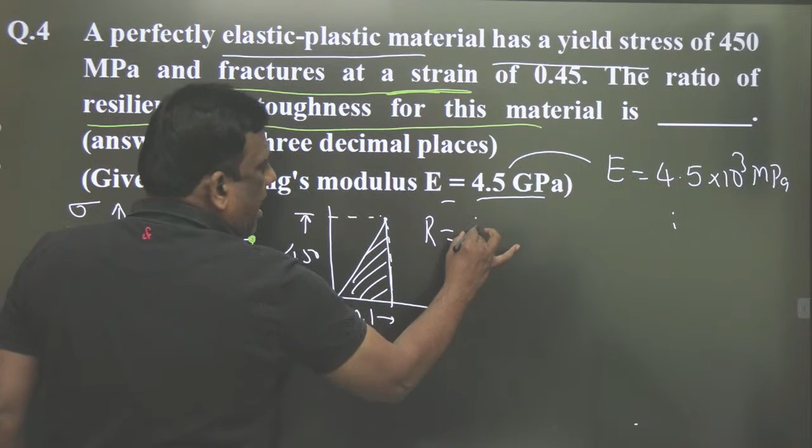So I want resilience. Resilience means this area, triangle का area. Resilience R लिखेंगे, half into base. Base is 0.1, height is 450. What resilience are you getting? 22.5. Am I right? Wonderful, अच्छे students हैं आप. 22.5, कोई दिक्कत नहीं, it's 22.5.

Now I want toughness. Toughness is not only this area but also this. अगर ये total 0.45 है, this is 0.1, what will be this area length? It will be 0.35.

देखो फिर से बता रहा हूं, ये वाला एरिया कैलकुलेट करेंगे हम। What is this vertical length? It is 450। So what is this length? Already this total is 0.45, this is 0.1, so this will be 0.35. तो calculate करो, 450 into 0.35.

But please note down that is not resilience, sorry, that is not toughness. That is giving me only this area. If you want toughness, it will be the total area, this rectangular area plus triangular area will be toughness. So rectangular area is 450 into 0.35 plus 22.5.

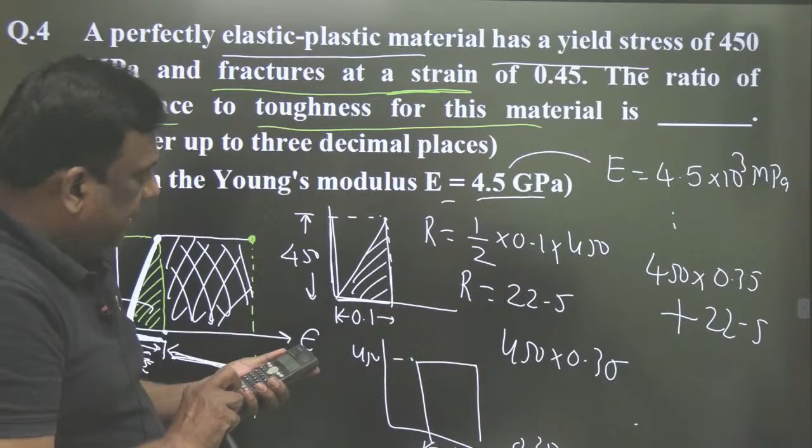Triangular area is this. So total कितना आ रहा है? 450 into 0.35 plus 22.5 is coming 180. So the toughness is 180 and the resilience is 22.5.

So he's asking ratio. Toughness is 180, resilience is 22.5, so 180 by 22.5, कितना आ रहा है? 8. तो मुझे उल्टा चाहिए सर, he is not asking toughness by resilience, he is asking resilience to toughness, that is 22.5 by 180. I think 0.125, anyone got 0.125?

Very good, अच्छा था क्वेश्चन। ठोको ताली एक बार, is it okay? 1 by 8 or 0.125 is correct. बोलो सर बोलो, is it okay? Shall I continue? Very good, 4 questions हो गए कंटिन्यूसली।

ये करो सर, अच्छा सवाल है। देखते हैं सर कितने लोग करते हैं इसको।

Pradeep has asked one very good question: sir, can we say flow stress as toughness of the material? Please observe here, flow stress we study in metal forming, that's a different concept. यहाँ पे toughness में दोनों भी आएंगे। Actually, toughness is showing what? Before failure, how much it absorbs.

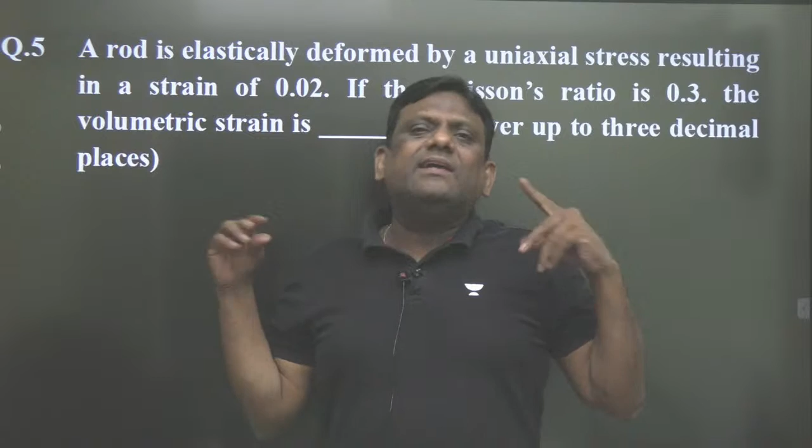For example, मैं आपको ये लॉजिक बताऊंगा। इधर देखो, कास्ट आयरन ले लेना, it's brittle, यहीं पे फेल होगा। अगर माइल्ड स्टील ले लिए, which one is tougher? Mild steel or cast iron? टफनेस का मतलब अप टू फ्रैक्चर व्हाट इज द टोटल एरिया? माइल्ड स्टील। वेरी गुड। इसका फिजिकल मीनिंग क्या है?

इसका मतलब है बिफोर अ मटेरियल कुड फेल, इट्स समथिंग लाइक दिस: मैं आपको मार रहा हूं, थोड़े स्टूडेंट्स एक दो मारने के बाद कहेंगे सर हो गया मेरा, और थोड़े स्टूडेंट्स कहेंगे मारो मुझे मारो। मतलब वो फेल होने तक ज्यादा एब्जॉर्ब कर रहा है। इट इज शोइंग दैट। इज इट ओके?

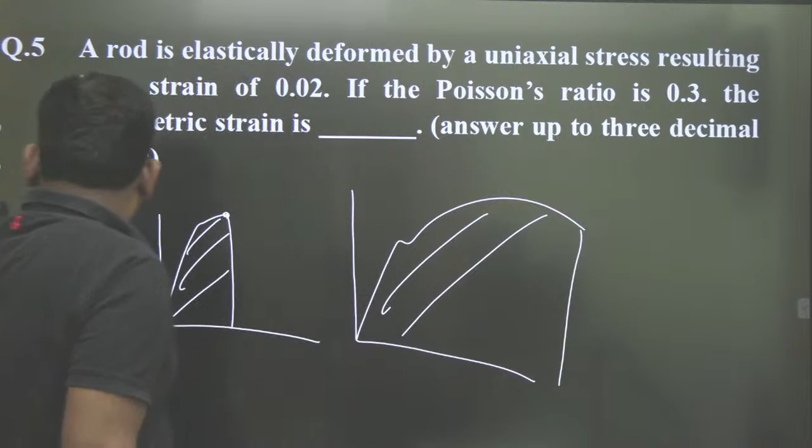समझ गए रे? क्लियर रे? क्लियर है? अच्छा है, चलो अब अच्छा क्वेश्चन करेंगे हम।

देखो, take this question, कितना अच्छा क्वेश्चन है। एक सेकंड रुको सर, रुको जरा। There is a rod. Let the length of this rod be L. Let the diameter of this rod be D. Can you tell me what is the volumetric strain of the rod under uniaxial loading?

अगर हम इसको थोड़ा इरेज करेंगे आराम से, कोई टेंशन मत लेना। Let the diameter be D, let it be loaded like this. Can you tell me what is the volume of this? Volume is pi by 4 d square L.

I do not know whether you remember or not. मैं क्लास में बताया था आपको, I have taught you very clearly, क्लास में बताया था। निशांत हैज गिवन 0.04, चेक करते हैं। समवन गिव 0.08।

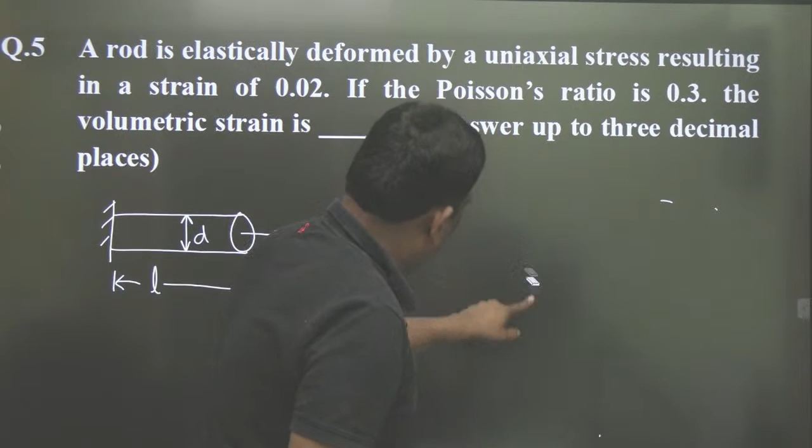What is given? The uniaxial strain defined along the axis, the lengthwise strain, is 0.02, and Poisson's ratio is given as 0.3. Then the volumetric strain is asked, how do we do this?

Let's see once. You know the strain, what is Poisson's ratio? It is y direction to the x direction, and of course there is a minus sign. Because when the length is increasing, the diameter is decreasing. The negative sign shows the opposite sign. Is it okay?

Y direction means which one, sir? Diameter. Y direction means diameter. X direction means lengthwise. So what is the strain in the diametral direction?

Nu into, of course minus, minus epsilon L. So diametral strain is given by minus Poisson's ratio, 0.3 into lengthwise 0.02. How much is this coming to, sir? Diametral direction strain is given by minus 0.3 times 0.02, if we multiply it gives 6, that is 0.006.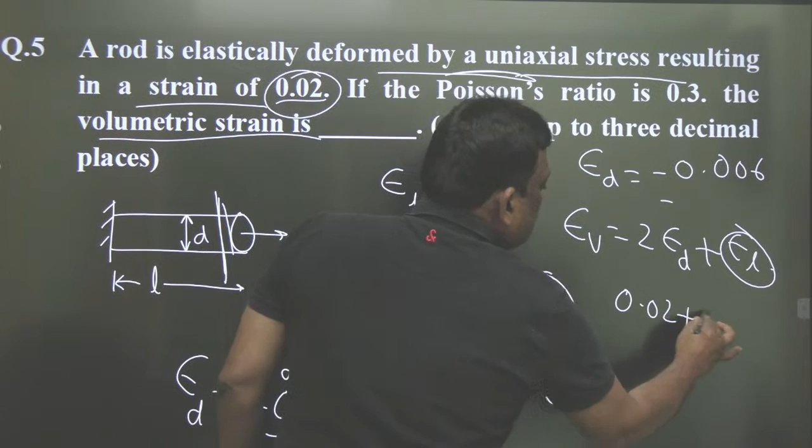0.006. Is it correct? No, I want volumetric strain. So what is volumetric strain? 2 times the diametral strain plus lengthwise strain. Lengthwise is already given as 0.02, plus 2 times diametral strain which is 0.006.

Is it okay, my dear students? You're not saying anything. So if you calculate, I'm getting this as 0.008. Is it correct? Check the values, sir. Concept is clear, sir. Every concept I am trying my level best to cover.

Okay, clear? Clear? Wonderful, sirs. Let's go to the next question. Wow, simple question, expected question.

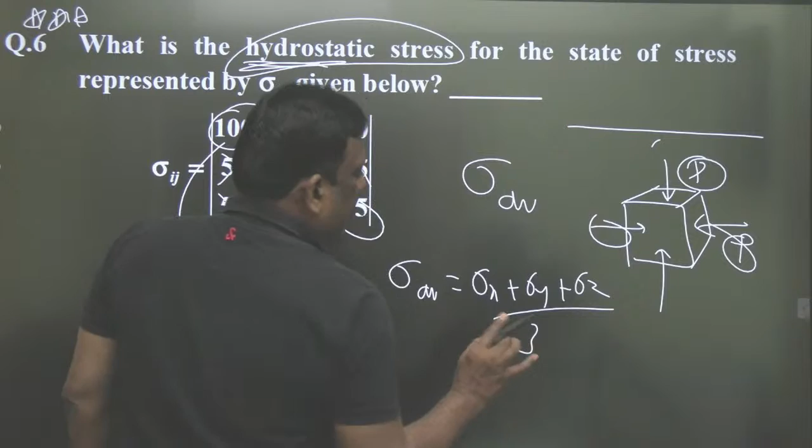थोड़े लोगों को समझ में नहीं आया, मैं दोबारा बताऊंगा। I will explain again. What is he asking in the question?

The hydrostatic stress बोल रहा है। Hydrostatic stress means same in all directions। For example, यहां पे देखो सर, बहुत अच्छा क्वेश्चन है, मैं बता रहा हूं।

Let this be sigma x, मे बी कंप्रेसिव, मे बी टेंशन, जो भी है, let this be sigma y, let this be sigma z।

तो आप बताइए, इस सबको मैं एक इक्विवेलेंट में कन्वर्ट करूंगा तो क्या आएगा सर? If I convert everything into equivalent, and you know very well sigma average, that sigma average which is same everywhere is hydrostatic। This sigma average is actually hydrostatic, nothing but sigma average। So whenever it is static, hydrostatic, for a static fluid there is no shear। Shear का तो छोटे, मतलब मैं ये नहीं बोल रहा shear नहीं है, I am interested in hydrostatic condition वाला, hydrostatic equivalent। तो क्या होगा?

तो देखो एक बार, so sigma x, sigma y, sigma z, so 100 plus 125 plus 75 by 3, that is sigma average, or this also known as hydrostatic stress। What is the value of this? 100 आ रहा है। Is it clear sir?

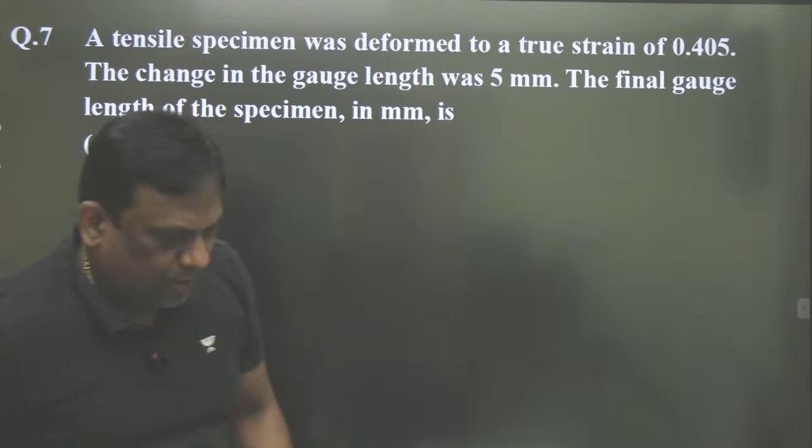वाह। टेक दिस क्वेश्चन, सारे वेराइटीज ले रहा हूं सर। क्वेश्चन पढ़ो एक बार। A tensile specimen was deformed to a... I tried my level best to include all varieties of questions sir।

मैं सारे varieties of questions लेने की कोशिश किया, I tried my level best। A tensile specimen was deformed and the true strain is 0.405। सारे points revise हो जाएंगे। The change in the gauge length was, what is the change in length?

It is 5 mm। The final gauge length in mm is, ये पूछ रहा है, what is he asking? The final gauge length। Dear students, वो पूछ रहा है final gauge length। आराम से सुनो।

My dear students, एक बात बताता हूं, in true stress we calculate stresses with respect to that instant area, because taking original... so you may be asking one question, what is true stress sir? It is the resistance to the area at that instant, because when you are loading, the area is changing continuously।

But my dear students, in strength of materials, we take engineering stress, engineering strains only। All this I had explained in my regular classes clearly। What is the reason for that? Because the deformations are within elastic limit, so therefore they are very small and negligible। When the deformations are very small, the change in area is negligible। When the change in area is negligible, my engineering stress and true stress are almost the same। That's why even if you take engineering stress, engineering strain with original values, original length, original area, so the changes are very negligible।

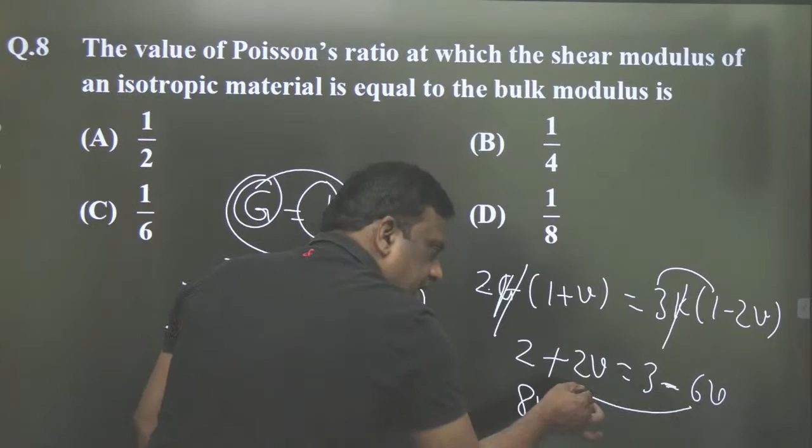So why have I given this question? There is a reason - sometimes questions come on the relationship between various elastic constants. Is it okay, sirs? Let's take this one, do it.

9th. वाह. 9th है ना, 9th करो।